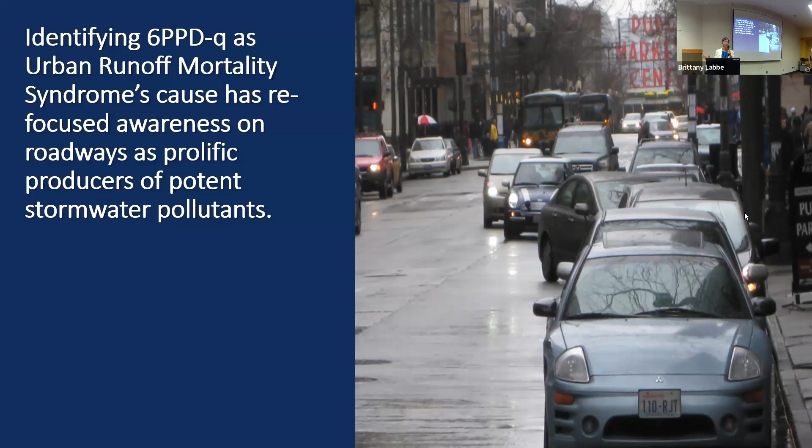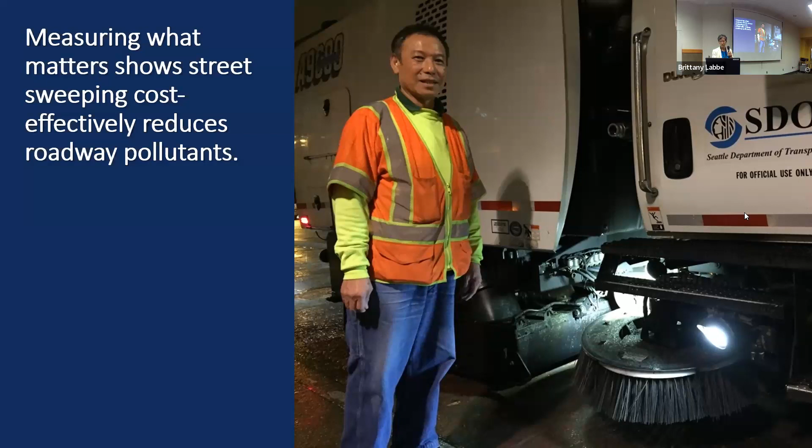paid attention to us. And if we measure what matters, it shows that street sweeping does cost effectively reduce those roadway pollutants. But there's low confidence in sweeping effectiveness, which all of you know, that holds us back from fully implementing this low barrier technology to address roadways and protect aquatic life.

So when I'm on the bus and I'm talking to people and I tell them what I do, they're like, wow, street sweeping, you're protecting the water. That's really cool. But if I talk to other stormwater professionals, all I ever hear is it creates fines. And I'm just like, oh, how can people still think that? So hopefully at the end of today, we will have changed your opinion if that's what you think about street sweeping.

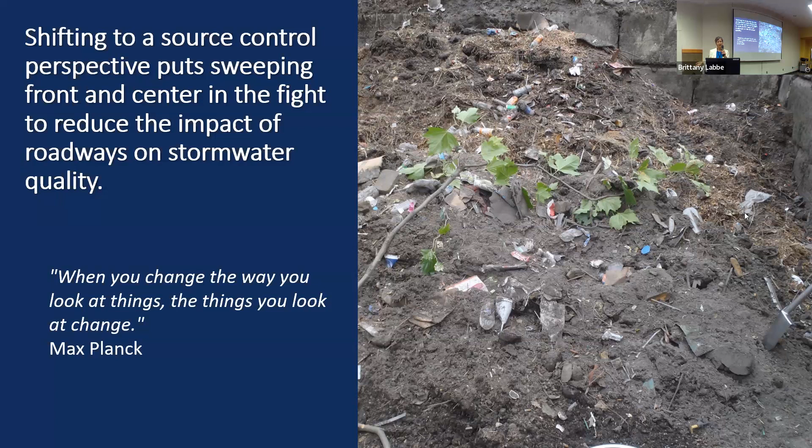So we're going to do that by shifting to a source control perspective, and that will put sweeping front and center in the fight to reduce the impact of roadways on our stormwater quality. We have been looking at street sweeping as if it is a treatment BMP. And we keep analyzing stormwater concentrations, but street sweeping is a source control BMP.

So we have 3 steps that we follow to look at street sweeping from a source control perspective. So number 1, we measure to produce actionable results. Number 2, we use that data to reveal meaningful insights. And then 3, we drive holistic stormwater program integration. So we're going to walk through each one of those today. And at the end, I'm sure you will all be positive that street sweeping delivers more environmental and community benefits at lower costs.

So we'll start with number 1, produce actionable results. We'll first look at measuring what matters. Then we'll look at being practical in our approach. And then we'll look at the results. Tie the results to operations. So as we walk through these, you can see, where'd my cursor go? Up on the top right, there's the little indicator of where we're at on the triangle, so you can kind of follow along as we go through the story.

But first off, we want to change that whole perspective. Not a treatment BMP, it's a source control BMP. And we can continue to ask the same question, does street sweeping reduce stormwater concentrations? And we'll probably get the same answer. It does, depending on what study you look at. If you look at the studies in Western Washington, Redmond, Tacoma, and Seattle, we have shown reductions in stormwater concentrations. If you look at studies in the Midwest, West, or the East Coast, it's been really difficult. There's a lot more variability, and they need huge sample sizes.

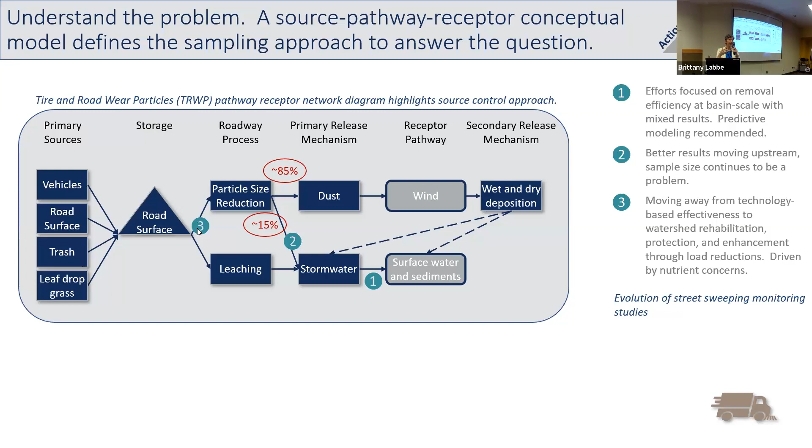So on the bottom, we're looking at increasing time to implement and investment costs, and the increasing cost per unit of pollutant reduced. So the best thing we can always do is behavior change. If nobody drives their cars, then we don't have any problems. But next best is street sweeping, source control. Next is the street scale BMP, get it right off the street.

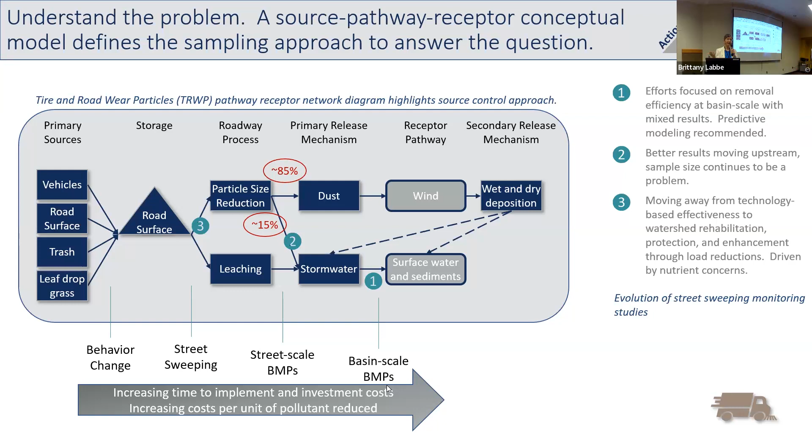And then the last thing we want to do is basin scale BMP, because it's so much water, concentrations are now diluted, and it costs a lot of money. And if you're someplace like Seattle, we really just don't have places to put those kind of treatment plants.

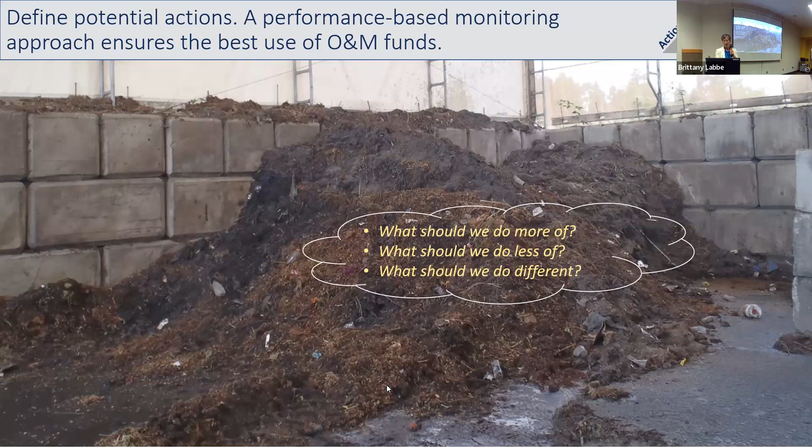So if we collect all this data, we need to ask what we're going to do with it. And so that will help inform the data that we want to collect. So what we want to know is, what should we do more of? We want a performance-based approach. What should we do less of? And what should we do different? And you can see up here on the right, we've changed to part two, be practical in approach.

So we've started off with a public value chain map. So we start with the resource. We invest in a clean street partnership with our Seattle Department of Transportation. And that's one of the reasons we've collected so much data, is because we're a partnership and we share the costs. So to share the costs, anything that goes to the MS4, we pay for. Everything else SDOT pays for. So that's why we have all this data. It's not just because we're data geeks, but I am a data geek, but this is the justification for it.

So once we have our resources, we are going to produce a service. So we sweep Seattle's arterial streets, mostly at night, using regenerative air sweepers, so that we produce results. We remove roadway debris, leaves, trash, and attached pollutants, reducing SSOs and flooding from leaf-blocked pipes and inlets, so that we have an outcome. We reduce the pollutant load washing and blowing off the road, protecting environment and community health.

And then for each one of these, we have metrics. So we have leading and lagging metrics. If we only measure the cost, we really don't know what we're getting for it. If we only measure our outcome, we don't know how we can do better. So if we have metrics for each one of these boxes in our chain, we can improve our results and figure out what's working and what's not. So we want to keep it simple.

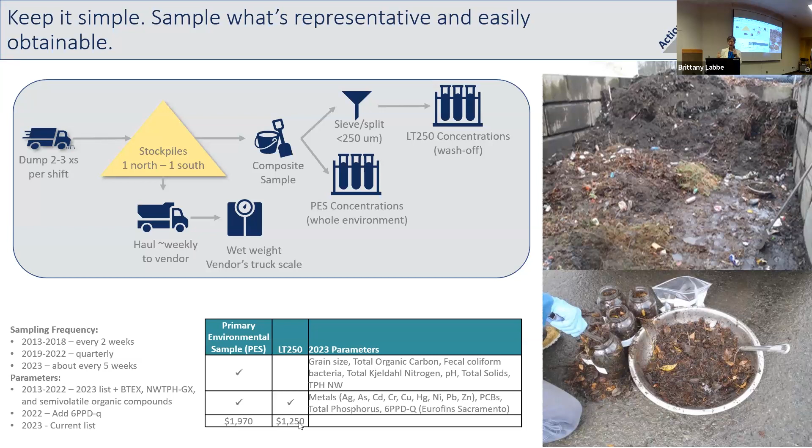And just in case you're interested, the parameters are here and the cost. The 6PPD-Q, we're using Eurofins in Sacramento. It's not cheap. Hopefully in the future, the cost will come down, but it's something we think is important right now.

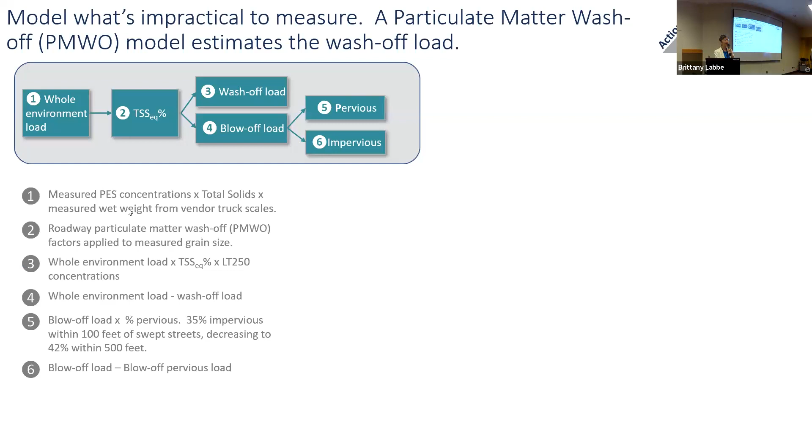So rather than analyzing for a treatment BMP and then modeling, we're analyzing for the whole environment and then modeling what's the wash off or the stormwater piece. So we start off with our whole environment load, and that's the measured primary environmental sample concentration times the total solids times the measured wet weight from the vendor scales. And then we calculate the TSS, which is the roadway particulate matter wash-off model.

So back in the early 1980s, Pitt did a study in Bellevue of 50 samples before and after rains, and he did particle size distributions. So we take those particle size distributions and apply them to the particle size distribution in the sweepings that we collected. And that's how we figure out how much would have potentially run off the street. So that's their TSS equivalent.

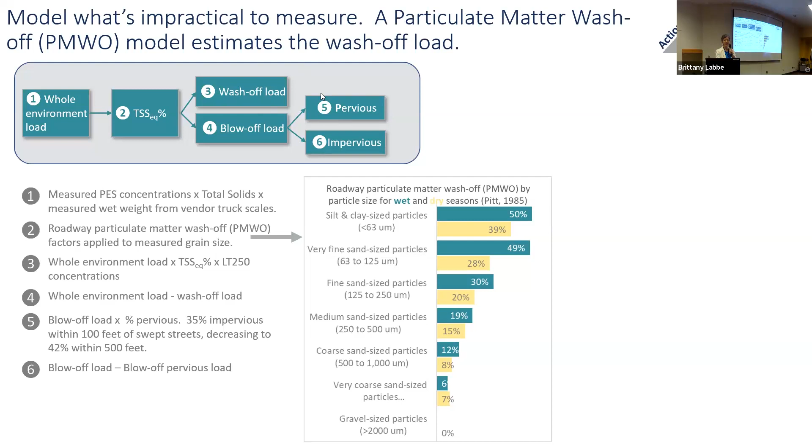And then from that, we get our wash off load, which is the whole environment load times the TSS equivalent, and then times the less than 250 concentrations. And then the blow off load is really just the difference. And then pervious, and there's an error here, that should say 35% pervious. So we take the pervious area and multiply that by the blow off load and just split that into pervious and impervious.

So if you look here on the map, here's our routes. In the green, it's kind of a skinny line here, is a 100-foot buffer on each of the routes. And then the yellow is a 500-foot buffer. So theoretically, the stuff is blowing off the road and landing somewhere. And for reference, in California, anything that is within 500 feet of a freeway, they regulate any sensitive uses like schools, anything to do with children or people who have health reasons. So a lot of the particles are going to settle out pretty quickly. Some of them go for quite a long ways.

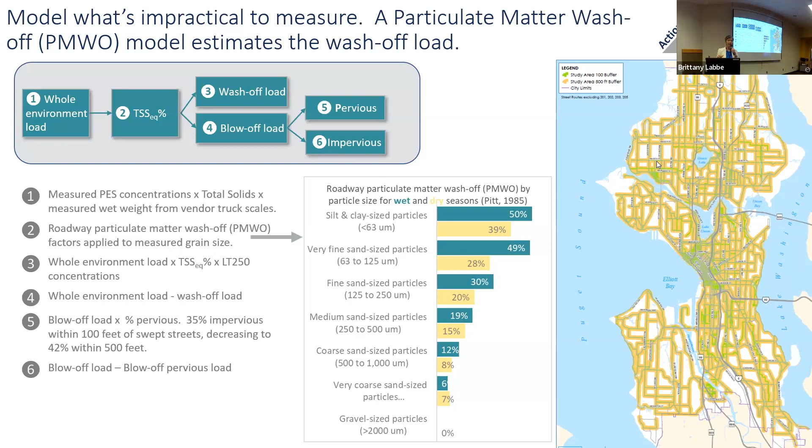So we've just changed, we're now tying results to operations. So our 2013 to 2018 study period, that's when we were collecting samples every other week. The north and the south kind of splits here at the Ship Canal. There's less routes up here. You can see it's a lot more dense down here in the south. The north is more residential, about 64% residential compared to the south, which is 40%. And you'll see that as we walk through on the results.

The other thing you'll notice is that we have 3 seasons for sweeping. We have a dry season, May through September, leaf season, October to December, and then the wet season is January to April. We split leaf out of the typical wet season because things are so different during the leaf season. We pick up a lot of leaves. They're very wet. It's a lot of mess.

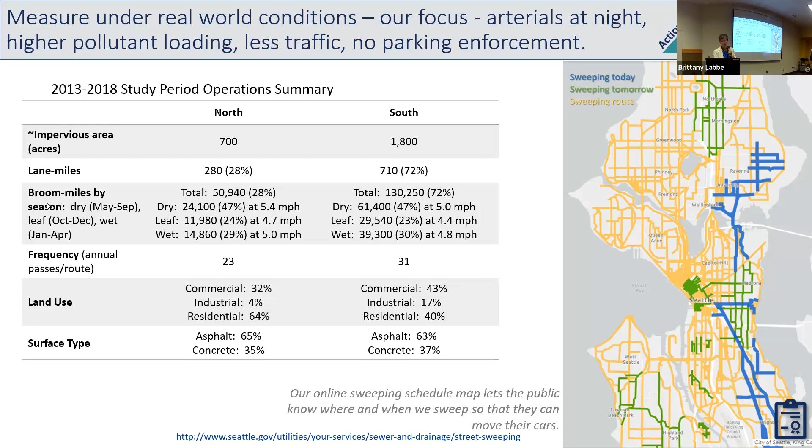So we do use technology to automate our operations, but we also really depend on our operators to tell us what's going on out there. And things have changed since we started in 2010. Things are a little bit more scary for the operators right now. On the right side here, the green, so this is an AVL, automatic vehicle location trace. So the green is the actual sweeping and the red is that travel time.

And this, oops, sorry, this is Route 17. So just the last 4 times that Route 17 was swept, you can see on the top line here, the velocity has changed quite a bit, a lot of variation. The pickup also, from 483 pounds per mile to 282. So every time you sweep a route, things are different, things happen out there.

And utilization is the time that we're actually sweeping out of the shift. So if we have a 10-hour shift and we sweep 5 hours, that's 50%. And we have a new guy who started on this route in January. And he's doing great because 50% is our target and he's hit it every single time.

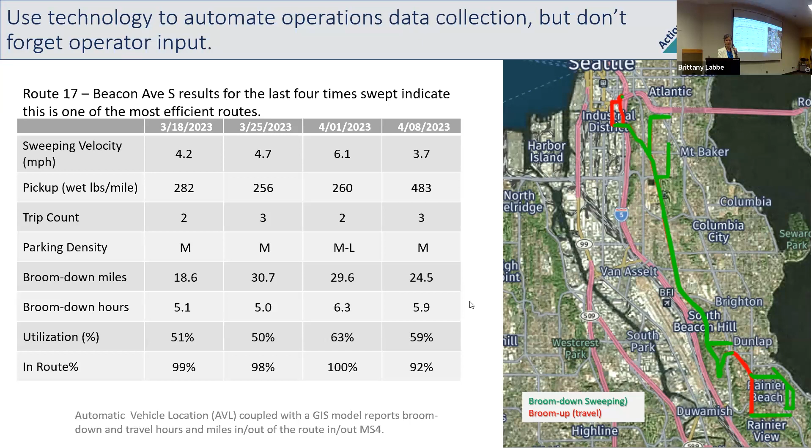So we do optimize the routes. There's about 40 routes. So if you can shave off 30 minutes of travel time on every route, it really makes a difference in your costs and what you're actually producing. So this is Route 03 over here, and you can see the previous route was long and skinny. This one has a lot of turns, and typically if you have too many turns, it's going to be less efficient.

When we look at the routes, optimizing them and scheduling them, one of the things we think about is the percent in the MS4. So we have a lot of routes that are downtown. Most of those are combined, and those we sweep weekly because it's Seattle and it's dirty and we don't want to have it dirty downtown. So after that, we prioritize routes in the MS4. So this is just listing routes in priority.

Pink is Route 3, which you're seeing here, and then the yellow is the long route from the slide before. If we look at the utilization, you can see they're fairly close. The more travel time, the less sweeping we got. So we really want to think about how to increase more sweepings for some of the ones that have poor utilization. The velocity, how fast: some of the routes are just slow, like if there's a lot of turns; some of them, if it's on arterial, they can go pretty quick.

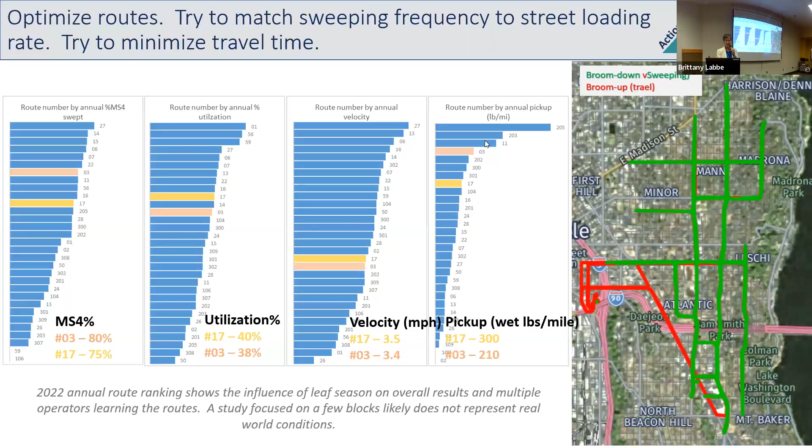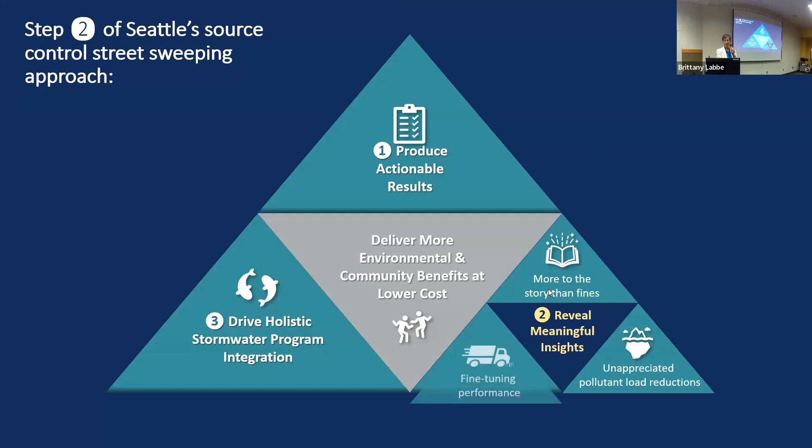And then the annual pickup rate. So these top 2 routes are leaf routes, and you can see they're picking up a lot. 03 is at one of the top, and 17 is down here. If you're picking up a lot, then maybe you need to sweep that route more frequently. So that was the end of step 1, measure to produce actionable results. And now we'll move on to analyze the data to reveal meaningful insights. So first we're going to talk about there's more to the story than fines. Then we'll talk about the unappreciated pollutant load reductions from blow off, and then fine tuning performance.

So this is just my personal bias. It's way past time to stop throwing street sweeping under the bus. And I actually got excited with the 6PPD-Q thing because I was like, finally, street sweeping is going to get recognized for the value that it provides, because we just keep throwing it under the bus. And I'm hoping all of you guys are going to not put it under the bus anymore after this talk. So street sweeping does reduce the pollutant load available to wash off.

And we're looking here at the wash off as a portion of the street load with the approximate size distribution. And this is all just for illustration because I took the Pitt data with the runoff particle size distributions and our data with what we picked up. So I'm mishmashing them together to tell a story. So again, what's happening on the street is really dynamic. It's not static. Things are always changing. So this is just to tell the story.

But if there's no sweeping and we use the Pitt data, about 16% of what's on the street would have washed off. About 38% of that would be greater than 250 microns, and 62% would be less than. So rain removes the fine particles. It doesn't really have enough energy to move the big particles. And if we're sweeping before the rain, the sweeper picks up more big particles and less small particles, then we'll remove about 12% of what's on the street. So that's about a 25% removal efficiency, which is what we found in our Seattle study.

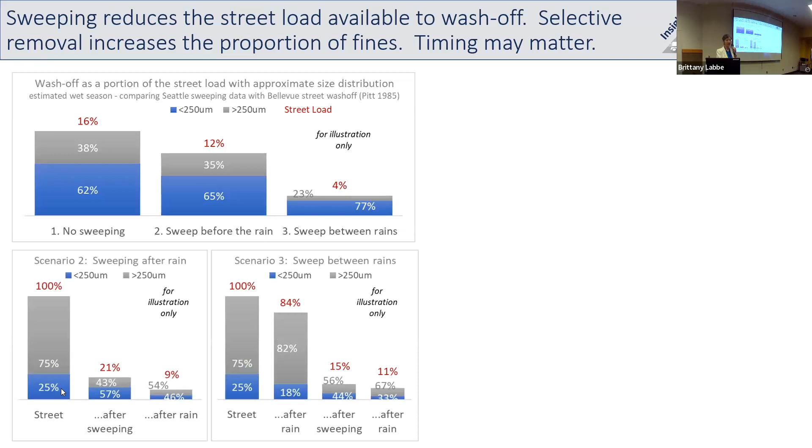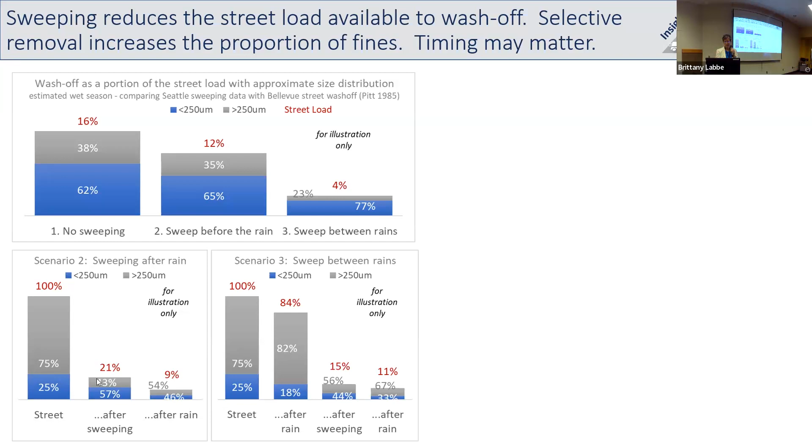So then again, this is just for illustration. So if we start off with 100% on the street, according to the Pitt data, about 25% of what's on the street would be less than 250 microns. So after we sweep, you see that that increases to 57%. There's more fines after we sweep. But the thing that we keep forgetting is there's like 75% that we just took off the street. It's a massive amount. And it's not clean. Even though it has larger particles, those larger particles still have pollutants attached to them.

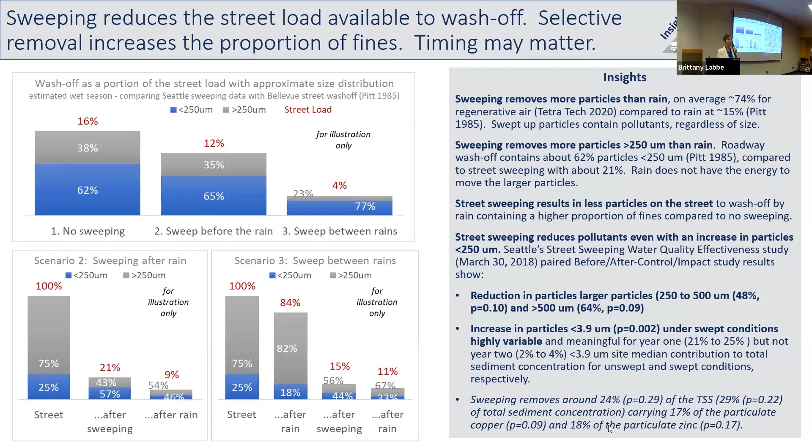So one thing: we did a study that was published in 2018 measuring what's washing off the street. And what we did find is that we're removing about 24% of the TSS, carrying about 17% of the particulate copper and 18% of the zinc. So we are getting pollutant load reductions, and that's just what's washing off the street.

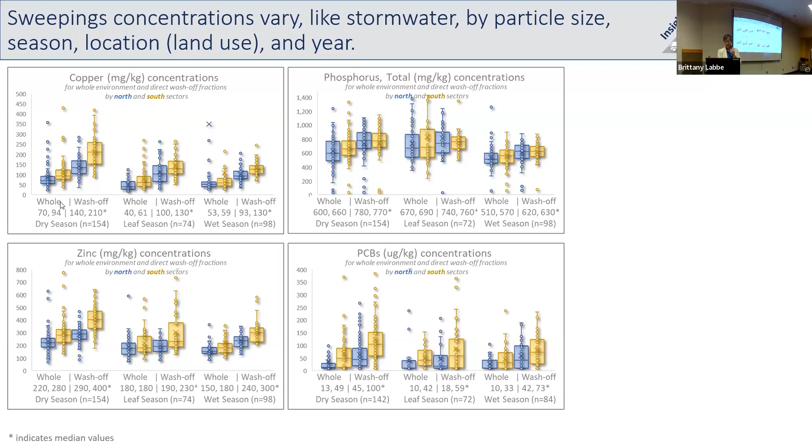And you can see there's pretty clear trends here. The whole environment concentrations are less, the wash off are higher. Dry season, wet season, dry season, a lot of variation. And the one thing to note here is the higher concentrations in the less than 250 micron fraction. So in order of preference, PCBs are 7.7, less than 250 to greater than 250, copper is 3.4, zinc is 1.9, and phosphorus is 1.5.

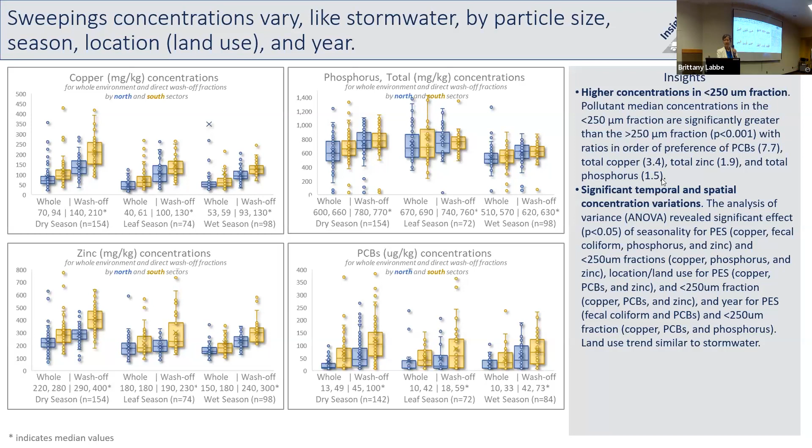So it doesn't matter much in phosphorus; if you take the load off, you're taking the load off. Whereas if it's something like PCBs, you really want to try and get those finer particles. So here we're looking at the TSS, which we're predicting from our model. Again, the north is in blue, the golden is south, and the dry season, leaf season, wet season, and here's the median concentrations. So in the dry season, like 10 and 11, leaf season, 8.7 and 11, in the wet season, 13 and 14. Down here is just the less than 63 microns. So you can see that we are picking up that fine material.

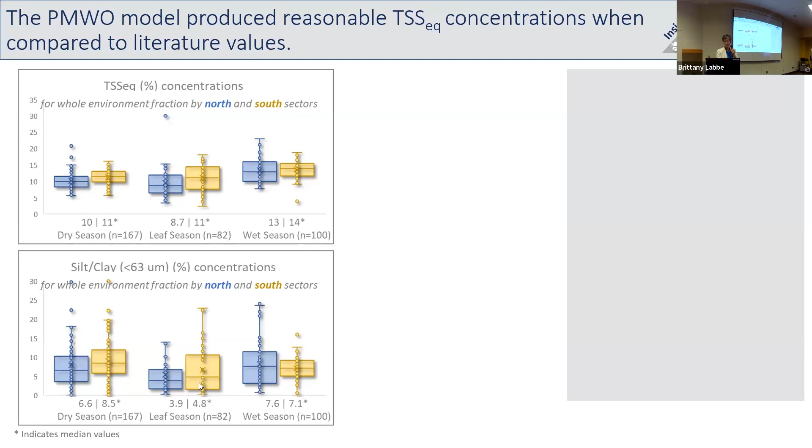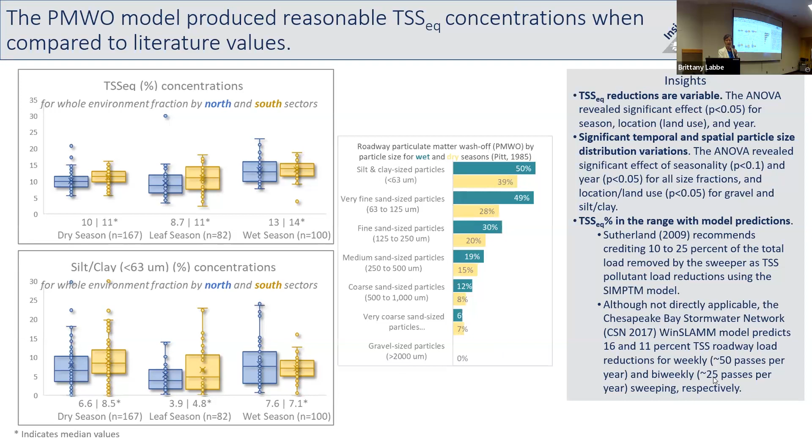And these concentrations are in the range of the literature. So Sutherland uses his SIMPTM model, and he thinks what we pick up from sweeping should count between 10 and 25%. And if we look at the WinSLAMM model, for the Chesapeake Bay, I used their data, so it's not really applicable, but it's in the ballpark. And there it's 16 and 11% depending on how frequently we would be sweeping. And here's, just in case you forgot how we get to this TSS, we just apply the PMWO data to our particle size distribution. So we've just moved into unappreciated pollutant load reductions.

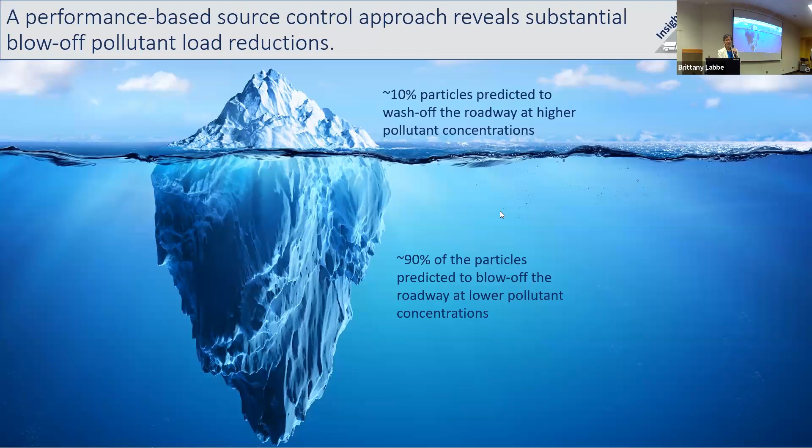And if you don't remember anything else from today, what I hope you remember is this iceberg. On the top, about 10% of the particles that we remove carry the higher pollutant concentrations; that's the water quality, that's the stormwater. But down here, we've got 90% of the particles, and they still have concentrations. They're lower than the fine particles, but it's still pollutants. And if we only focus on this 10%, we're really missing out on the impact of street sweeping.

So looking here, we've got 2018 metal pollutant load reductions. The wash off is in blue. The gray is what would have blown off the road and landed on an impervious surface, and green is what would have blown off and landed on a pervious surface. So you can see for zinc, 42 kilograms is what we would count for stormwater, but we're removing 307 kilograms from the environment. This is just looking at it in terms of the mass. What does this really mean?

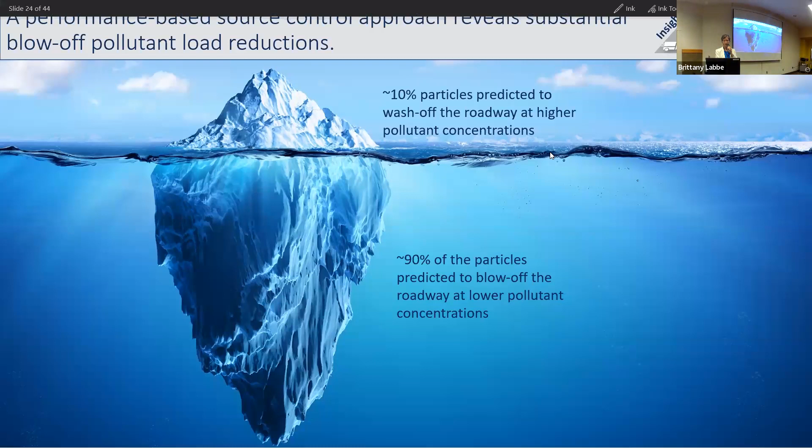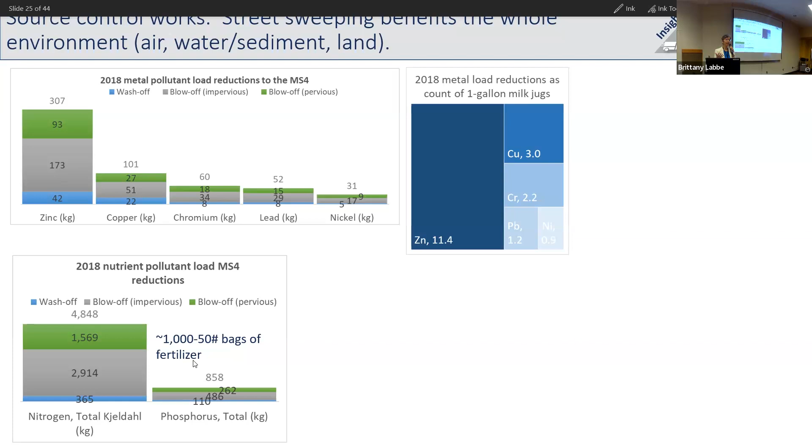So in zinc, in 2018, we would have removed about 11.4 one-gallon milk jugs of pure zinc, copper about 3, chromium about 2.2, lead about 1.2, and nickel about 0.9. If you think about the lead, there shouldn't be any lead. Where's the lead coming from? But we're still taking lead out. Down on the bottom, we're looking at nutrients. In 2018, this would have been equivalent to about 1,000 50-pound bags. So it's not insignificant.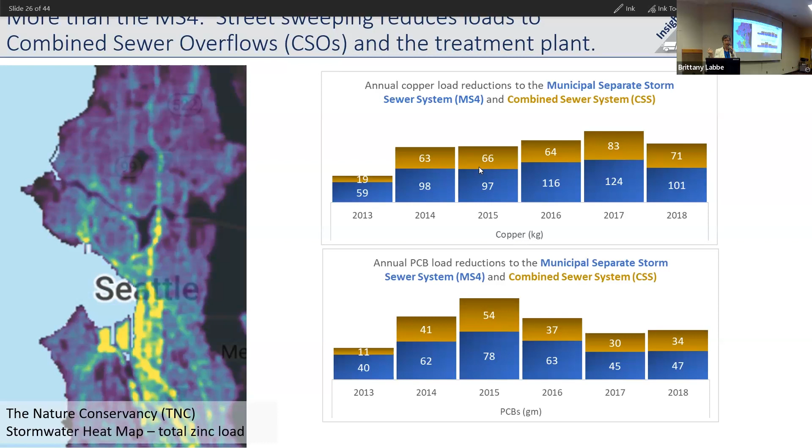This is looking at the same thing, box plots, but now we're looking at the pickup rate, the mass per mile that we sweep. And that's really what we use to figure out where we need to change, why we need to change, what's working, what's not working. So same thing again, north is in blue, south is in yellow, and then dry season, leaf season, wet season.

And you can see it's kind of the same type of trend, but if you look here for TSS, the whole is quite a bit, the wash-off is quite a bit less. Phosphorus, same thing. Fecal coliform, we measure a lot of fecal coliform in the dry season, but it's wet, it's warm, and most of that is probably just because it's growing, because we don't see that in the leaf season and the wet season. But if you look at zinc, the whole environment is quite a bit, and here's our little wash-off here that we count for stormwater.

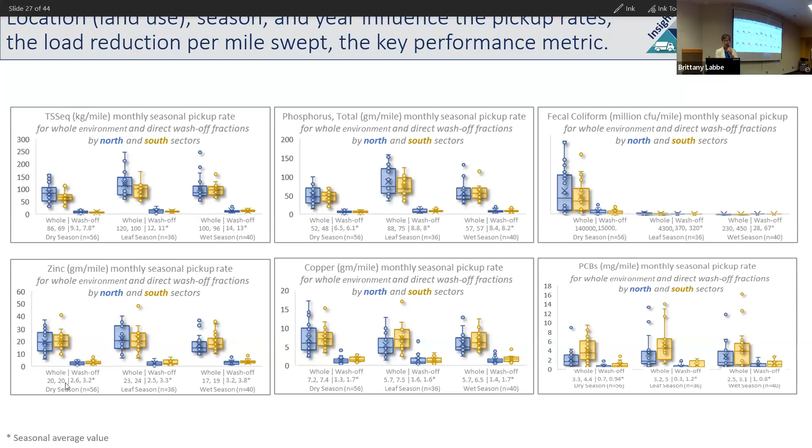So this is comparing north and south. So we have wash-off at the top and the whole environment at the bottom for each one of these parameters. So if you look at the south, it actually removes less TSS and less phosphorus. And the south has 40% residential compared to the north, which is 64, which is what we find with stormwater. But the south has more copper, zinc, and PCBs.

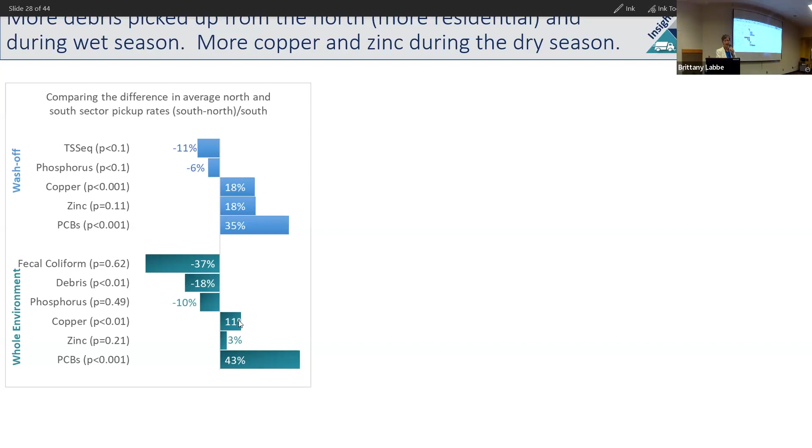And besides having some more industrial in the south, we also have the port and a lot of heavy traffic. So we get a lot more copper, zinc, and PCBs in the wash-off. And if you look in the whole, the north has a lot more fecal coliform, more debris, and more phosphorus, and the south has more copper, zinc, and PCBs.

So if we look at the same thing for wet season versus dry season, in the wash-off we're getting more copper, zinc, PCBs, phosphorus, and TSS in the wet season. Which can be counterintuitive. How can we be picking up more material when it's all washing off the road? But my theory is that our roads are wet pretty much all wet season, so some of that material is just suspended on the road and we just come by and suck it up.

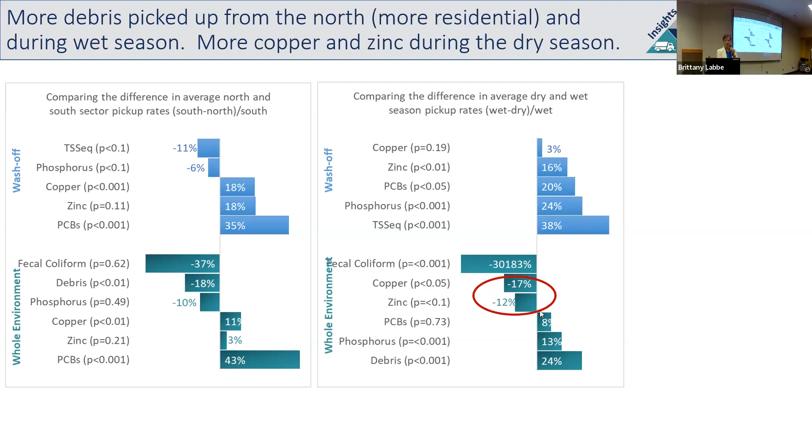Now looking at the whole environment, fecal coliform, which is probably temperature related, we pick up way more in the summer. The surprising thing is with copper and zinc, we're picking up more total copper and more zinc in the dry season, but we pick up less of the wash-off, which is kind of counterintuitive. So what it might mean is that sweeping works great in Western Washington during the wet season, and it might also work great in Eastern Washington because we're picking up more of the total copper and the total zinc.

So the key metrics that we use to track efficiency, I've got our 2022 costs. If anybody is trying to plan something, our costs are most likely higher than everybody else's, but it might give you a good indication. Our costs are $256 an hour for every hour that our sweeper operator is out there. And to convert that into efficiency, it's how much money are we spending per hour that they're actually sweeping. That's our utilization in 2022. We're at 37%. Our target is 50%.

We've been having a terrible time with people. We haven't had enough. We've been using overtime. You can see here 18% overtime is included in this cost. And we get somebody on night shift because we're sweeping mainly at night. As soon as they get trained up and a job opens up on day shift, they move to day shift. So we have a $1.50 an hour differential, but this year we're finally getting some traction.

And the thing that SDOT did was start an academy for the laborers to get their commercial driver's license. So they're training them and paying for them to get their CDL. So now they can work out of class as a street sweeper operator, get trained up, and then we'll always have people. That's the plan. So more hours sweeping in a shift is what we want.

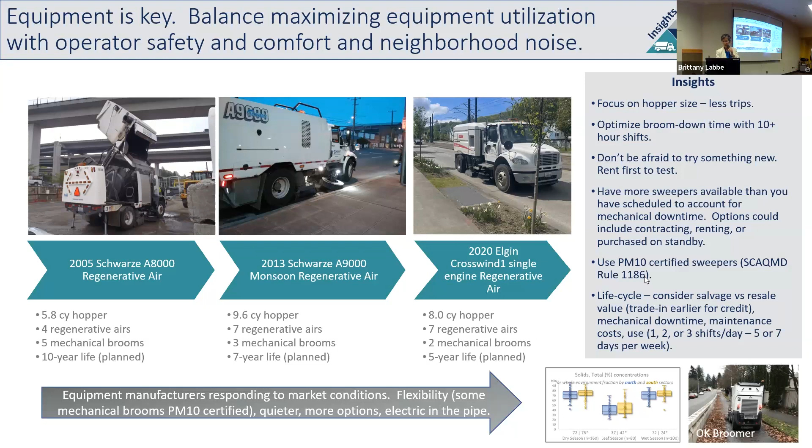So that's the end of revealing meaningful insights. How are we doing on time?

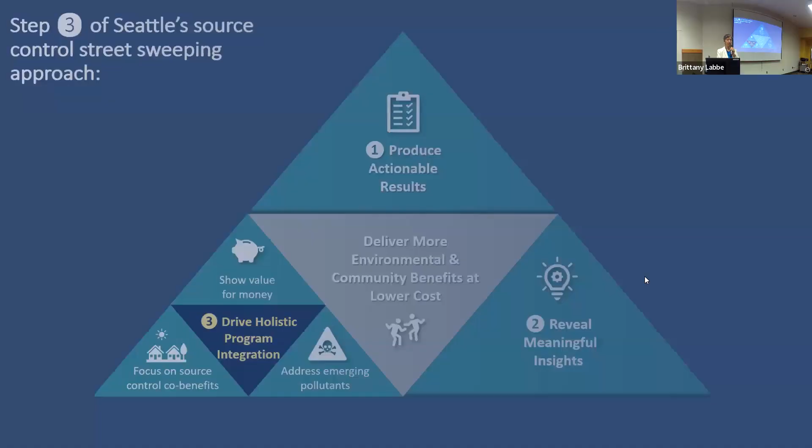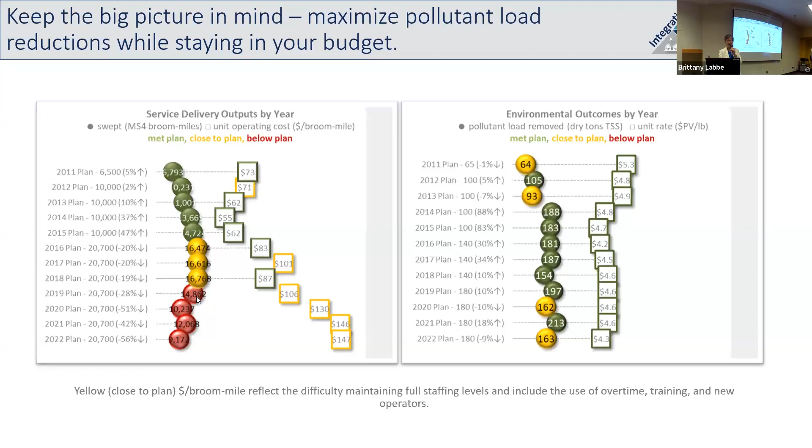Okay. So the last thing, we want to drive holistic program integration, show value for money, address emerging pollutants, and focus on source control co-benefits. So this is just some charts. On the left, you can see the miles swept and the dollars per mile. And on the right, you can see the tons and the dollars per pound. So even though our costs went crazy here in the last 5 years because our miles went down, our dollars per pound have been good.

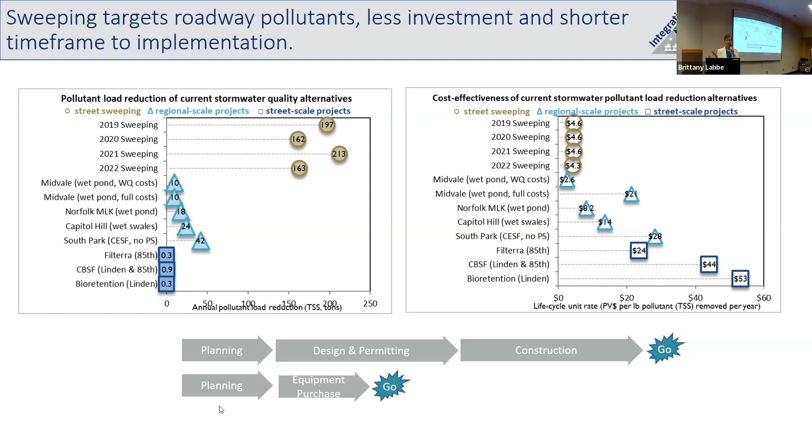The other ones, planning, design, permitting, take a long time to get a project going for us. Our South Park water quality, we've been working on it since 2006 and it's not in the ground yet. Street sweeping, plan, get your routes. It takes like a year to buy a sweeper, so that takes some time, but then you're up and ready to go.

Back to the one thing I want you to remember, our iceberg. For less than the value of a McDonald's breakfast meal, you can get a pound of TSS. It's got all these pollutants attached to it and all these blow off. It's a lot of stuff.

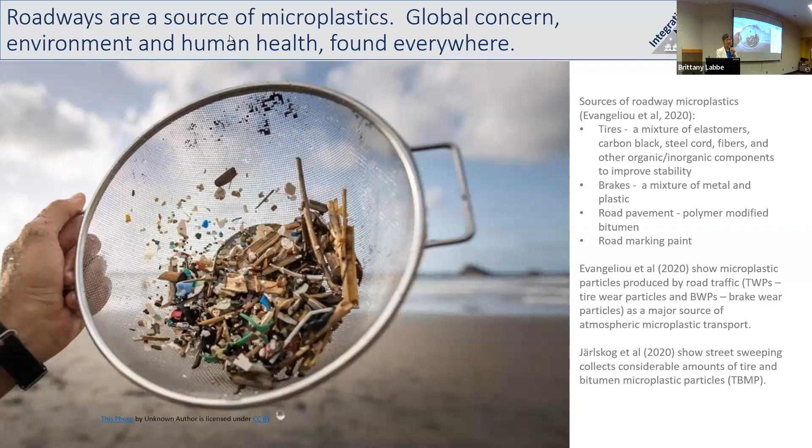So moving on to emerging pollutants, the roads are also a source of microplastics. You know, it's a global concern. Sources on the road include the tires, brakes, the pavement itself, and the markings. And Järlskog has shown that street sweeping does remove the microplastics.

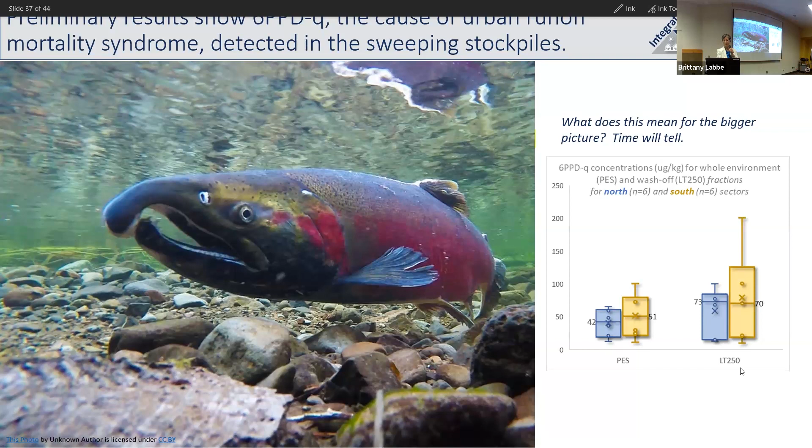We did start sampling last year, for 6PPD, preliminary results. We've detected it in everything. The primary environmental sample, or the whole environment here, the less than 250 here. The sample size is really small, so we don't know yet what it really means, but you can see the same kind of trends. North is less than south. The primary environmental sample is less than 250.

So moving on to co-benefits: healthy waters, as less pollutant washing and blowing off our roadways means less in our waterways. Healthy communities, less pollutants washing and blowing off our roadways means less community exposure. And efficient O&M, less debris on the roadway means less maintenance.

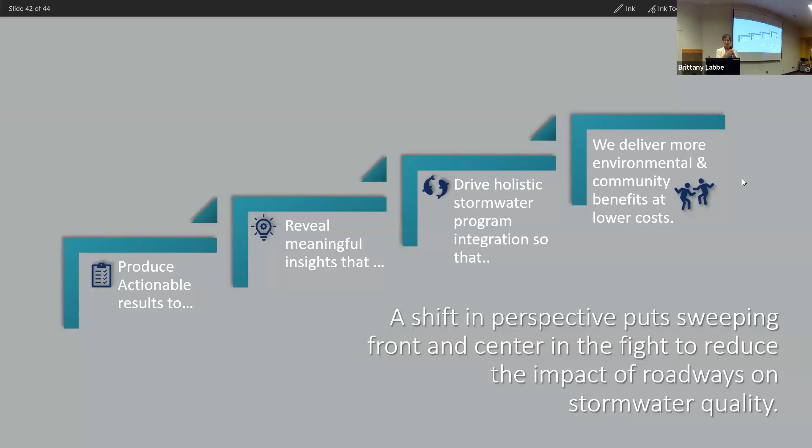So if we measure to produce actionable results, and analyze to reveal meaningful insights that drive holistic stormwater program integration, then we will deliver more environmental and community benefits at lower cost. Street sweeping just needs to be a piece of the puzzle. So I'll challenge all of you. And I hope you would want to do this without the regulation, but it's probably coming.